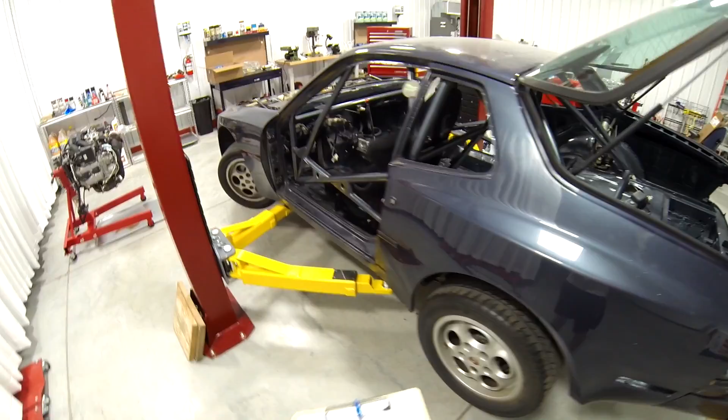We're here with our 1987 Porsche 944S. Her nickname is Porsche McPorscheface because I couldn't come up with a decent German female name that I liked.

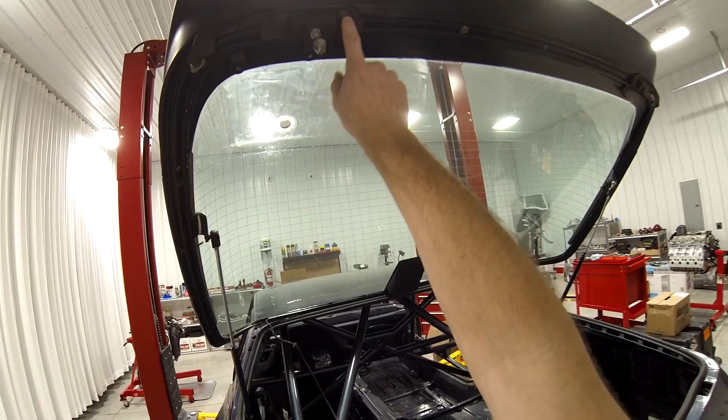So our goal today is to prevent our hatch locks from leaking water. If you have a normal 944 and you're going to use your hatch locks, unfortunately the best way to fix it is to replace this rubber here, replace this rubber here, and replace this rubber here. And I hate to tell you, but $100, $100, $100. The most blatant, complete ripoff.

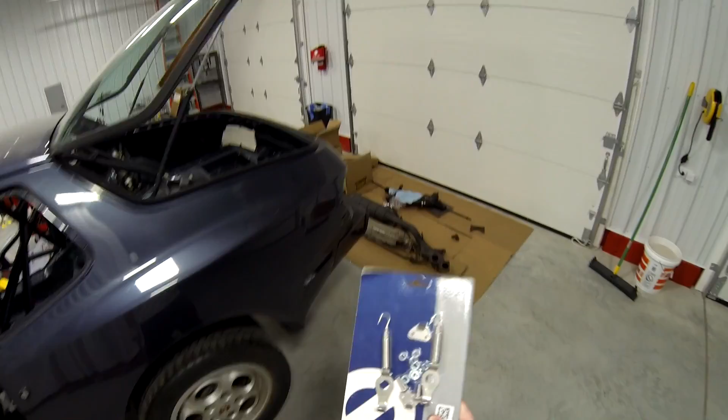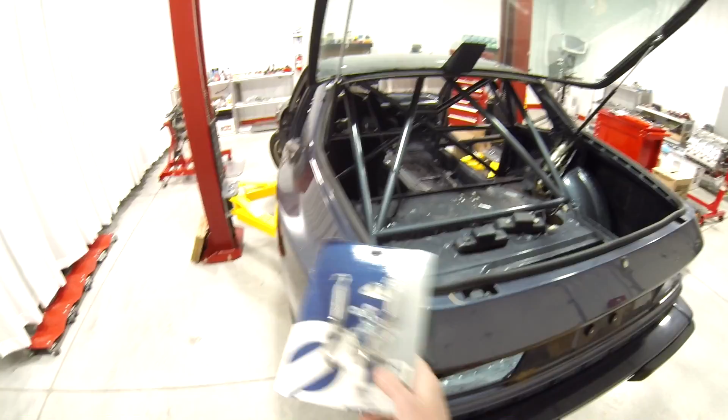It's just awful. Now, because this is going to be a race car, and of course I left my example all the way across the room, it is required by the FIA and the local rally racing rules that you cannot have any locking mechanisms on your hood, doors, or hatch. Somebody has to be able to get into the car to either shut your fuel off, save your life, or pull a fire extinguisher or med kit out. You can't lock anything. So you have to use these.

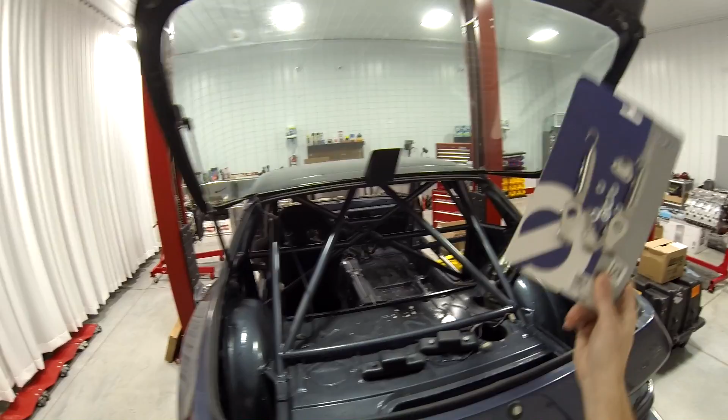I'm going to use 4 of them because of how heavy this hatch is. I'm going to mount them probably here, here, here, and here. I'm still working on how that's going to work. So I'm going to completely remove this locking assembly. And you can see I already gutted the interior assembly. So this specific engineering journal is completely useless to somebody who's going to use this hatch lock.

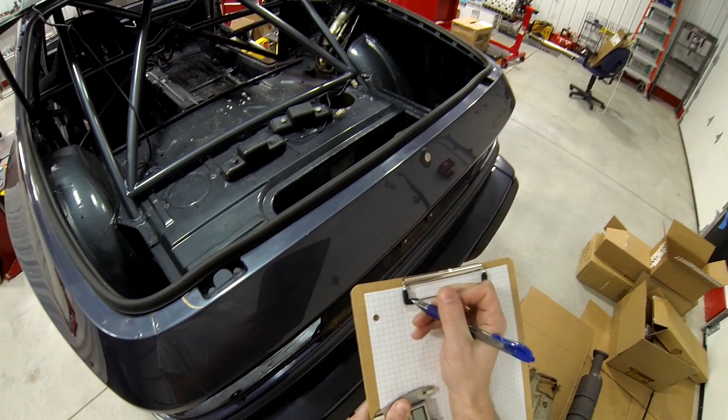If you're going to use something like this, in this case, this is a genuine Sparco product. I double and triple and quadruple check since Amazon's completely unreliable these days and they sell Chinese counterfeit products with the same brand name and packaging. Anyway, I don't know which engineering journal this is, but it's part number 7, and this is the hatch lock seal.

So the first thing to do, and it's going to kind of suck because this light's shining right in my eyes, is to figure out if I can remove this, is it going to cause a leak from up here? And if not, then can I just cap this off with a 3D printed cap and some silicone and call it a day?

Which is my primary goal. My secondary goal is to create a cap that actually dips down so this lock clears the 3D printed cap, but then water would pool in the cap.

Also, if you don't have this seal fully sealed, 100% water and airtight, then the vortex off the rear wing, or tail of the car, will actually lift your exhaust fumes up and right into the hatch, and you're not going to have a good day. That's also why the taillights have to be fully sealed properly for water.

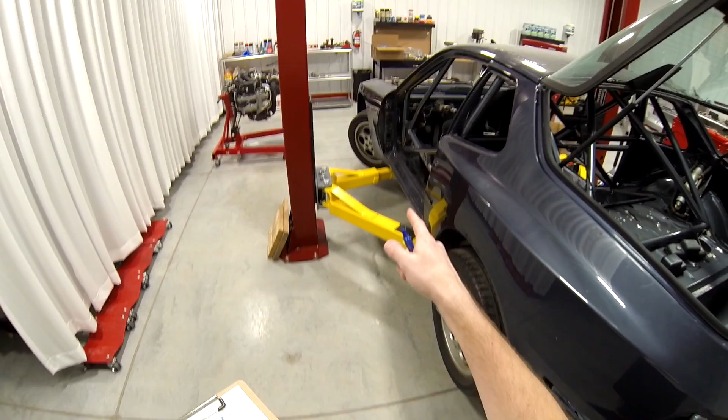I'd like to shoot my exhaust out the side, but you can't do that because there's interior stuff in the way. I might be able to shoot my exhaust out there, but the torsion bar is in the way, so we're still working on that. We can't shoot it out in front of the driver door because that's illegal, and this car, being a rally car, has to be road legal.

All right, anyway, so the first step is to get this disconnected, and it looks like it's a triple square. Now, if you haven't heard the term triple square before, then you've probably never worked on your Porsche before. It is a wonderful little proprietary driver set.

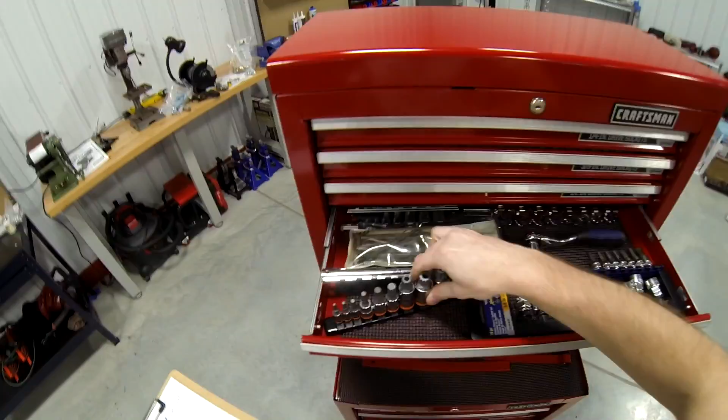That obviously is extremely expensive, even more expensive than Allen or Torx, and it's used in many places on the car that are extremely questionable. So you're gonna need this. And then I'm gonna have to, of course my 3/8 is missing, so I'm gonna have to hunt it down.

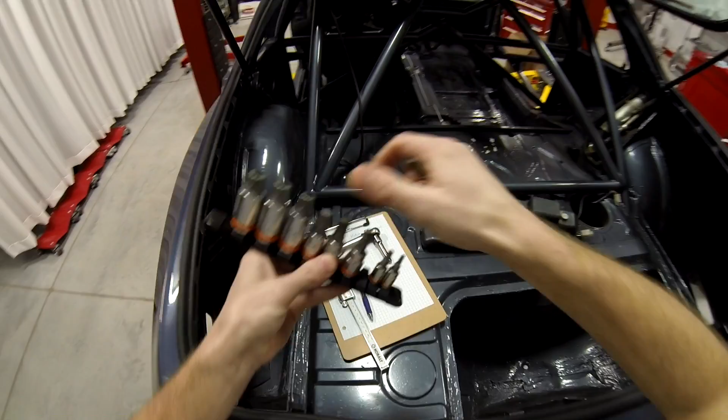Okay, all right, so we're going to remove this lock, or we're gonna attempt to. It might be smarter for me to use an impact, but I don't think triple squares like impacts. And of course it's a freaking quarter inch. So stupid. I hate triple square.

Just because you make something exclusive doesn't mean it's high quality. Porsche.

Okay. Hopefully this thing isn't frozen in place.

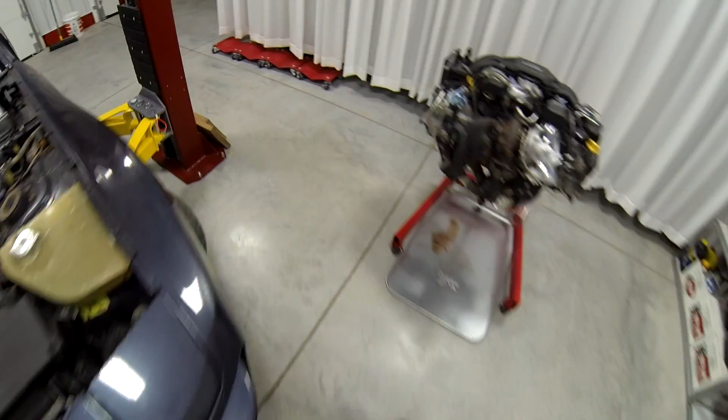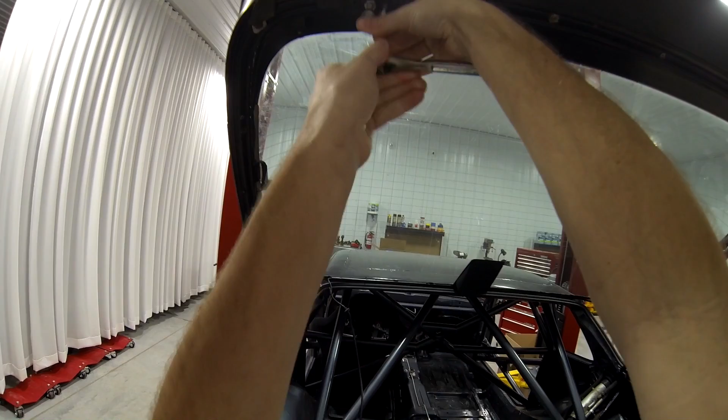I apologize, normally I have my tools closer to my work area, but everything's a complete mess right now because of the engine build we're waiting on oil pump bolts for, which is frustrating since the oil pump and timing chain kit didn't come with oil pump bolts. Those bolts are apparently special order. At least from the dealership I was at, they didn't have any within a couple hundred miles, so they're coming from a long way away.

So we take these out, and I am going to try and reverse engineer this. Man, it looks like it's pretty stuck in there.

Let's see, I might need a... again, I apologize, my toolbox is so far away from the workspace, I don't have anything, everything's a mess. Yep, it's a 13, what a surprise. Man, I am so surprised. Not really.

Okay, so we're gonna loosen that all the way up. Oh, well, I didn't need to do that actually. Just broke it loose. So it looks like this piece actually...

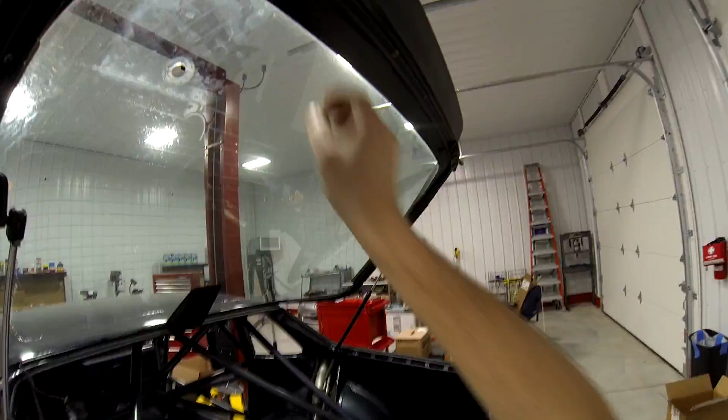Yeah, because the seal where this attaches, it looks like there's gunk in here. I need to... somebody maybe tried to repair a leak the wrong way at some point, is what it looks like to me. Yeah, there's that welding from the OEM. Man, what a shit job.

So this block is gonna go down in this recess, which means I need to 3D print this with enough room for this block to sit. And it also means we're gonna have... oh boy, yeah, they don't make this easy. I think removing this is the right thing to do though, and I'll design this in 3D CAD.

Unfortunately it's pretty ate up, but I think I could at least help somebody get the 3D CAD, and then if they wanted to take it to a 3D printer that was a little more skilled, meaning not extrusion based, but like an HP printer or some high dollar setup that can print flexible polyurethane or TPU, thermoplastic polyurethane, then they could probably have a seal printed.

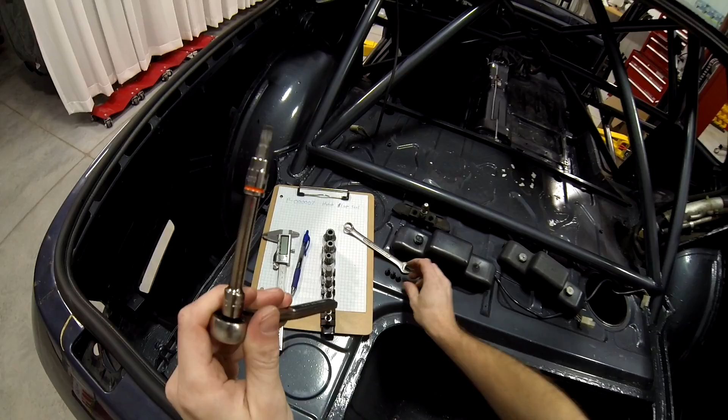And I guarantee you, especially since I'm doing the CAD myself, which is the most expensive part, it would be way cheaper than $100. It'd probably be like $10, I would assume, no less or no more than that, because I just can't imagine it being any worse.

That's what a magnetic parts tray is for. Okay. Just... oh yeah, not like I just vacuumed that or anything.

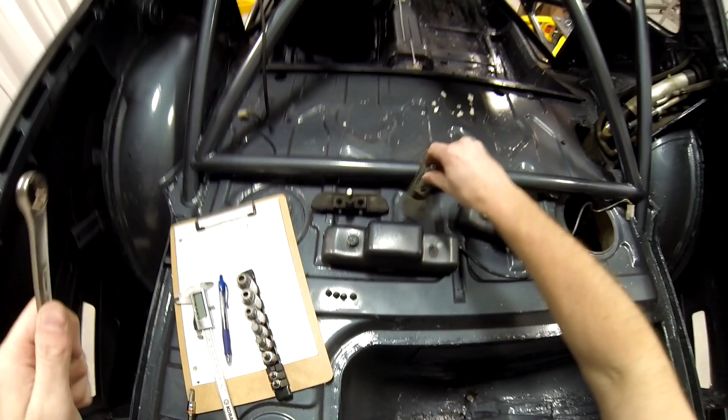Okay, so now I have both of these. They are perfectly... wow, that one's really torn up. Are they not symmetrical? Uh-oh.

Ooh, they're slightly angled. Huh. Oh hell, I need to keep those as far apart from each other as I can, or I'm definitely gonna get them mixed up. So I don't think there's any L's or R's left after all this time.

Man, it's like a metal rubber composite. Still not worth $100, you're never gonna convince me of that.

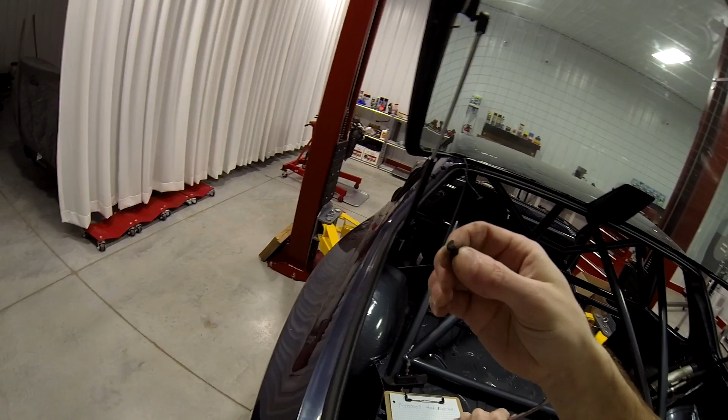So now the next step... yeah, there's like somebody was trying to repair it with epoxy. That's pretty shitty, that makes my job way more difficult.

Damn it. I'm gonna have to... and I need to get an accurate measurement, so I'm gonna have to scrape that off real quick. I have a putty knife hiding somewhere. Scrape, scrape.

And it looks like I might have to 3D print a little piece to go over this in order to seal properly, or just do what they did and use some putty.

Man, I can't tell if that's hard, that's hard to tell. Sorry, this was supposed to go a lot smoother than this, but obviously in the real world it never does, right? There was a flashlight around here somewhere. There we go.

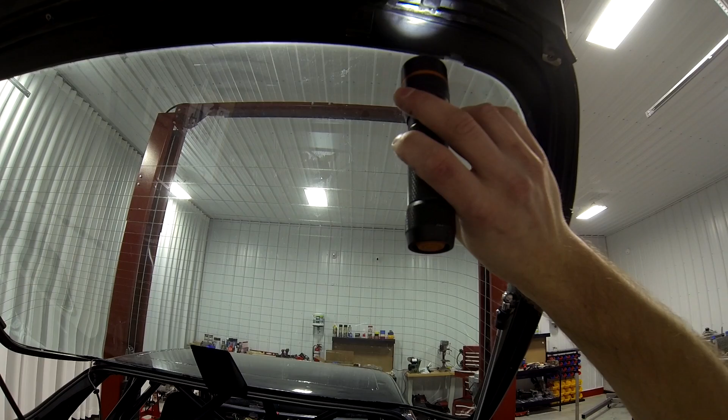Oh yeah, somebody just shoved a bunch of putty in it. Of course.

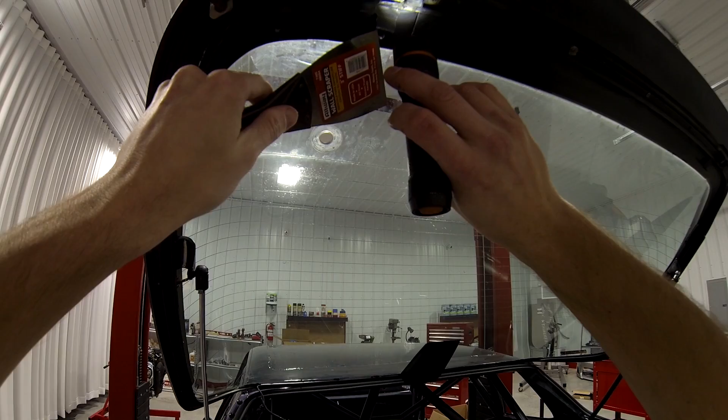Well, it looks like there's seam welding and putty, so I might have to get somebody out here with a wire wheel. There we go. Yeah, so there's some seam welding, which we can't do anything about, and then there's putty from somebody trying to make a cheap-ass repair.

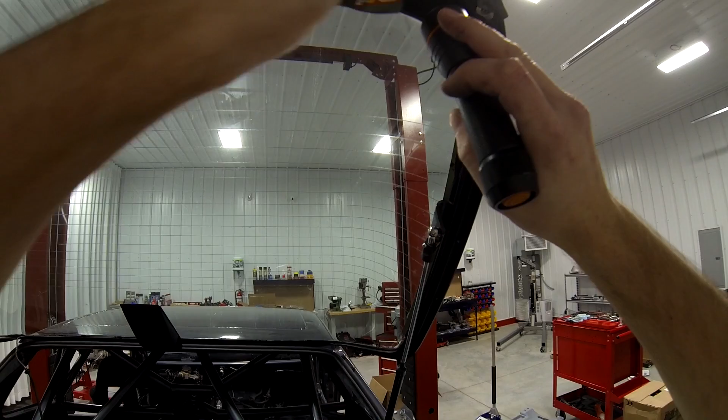Okay, so that's a seam weld. That's a seam weld. Definitely will need to 3D print something to help this gasket not get torn up. It shouldn't be that hard. It's just staring into this freaking sunlight.

Okay, that's pretty clean. So, my workbench is a disaster, by the way. The whole shop's a disaster right now.

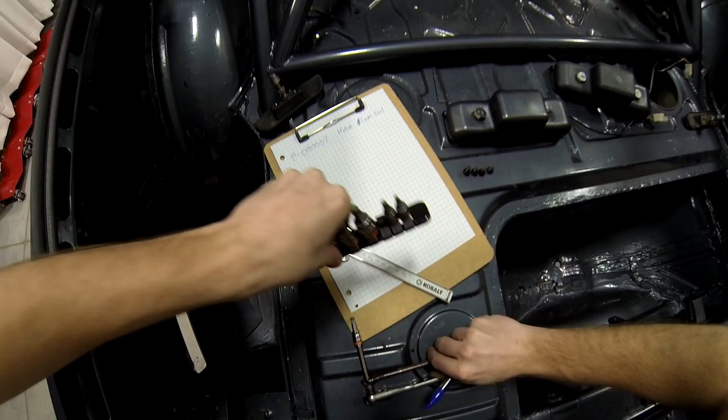So anyway, this thing, keep all of these here. And if any bolt on this car that I take out is a triple square, I am not putting a triple square back. I'm gonna go get a normal socket head bolt or a normal hex head bolt at the highest possible grade, so I think it's like 12.9, and replace it with that, because I hate triple squares.

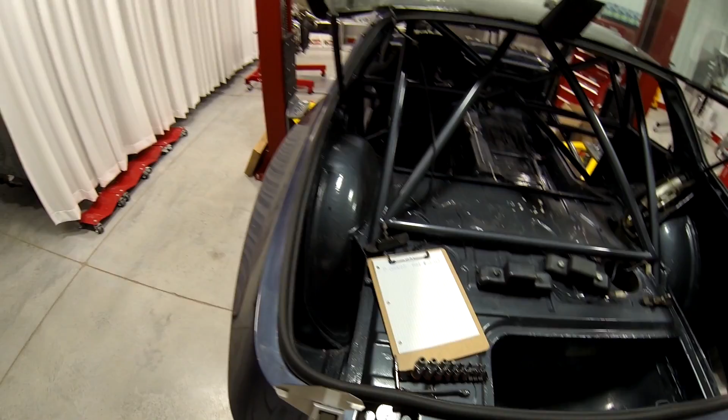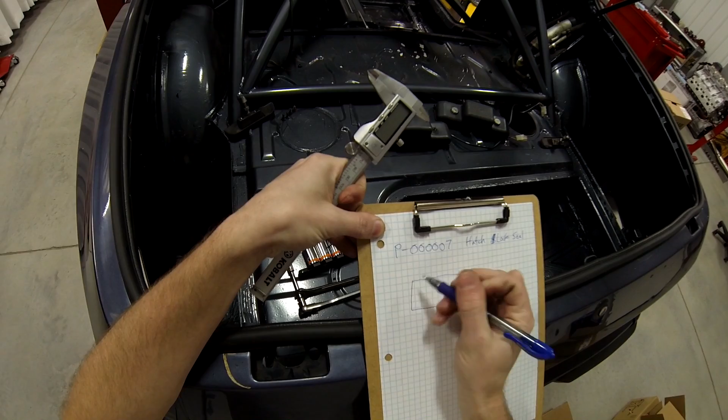Okay, so it looks like this lock hole is just kind of stamped into the body, and it is symmetrical. I can tell just by looking at it. And it's also a nice simple square, so we have the square, and then we're going to have radiused corners. It looks like the front radius is a little sharper than the rear radius.

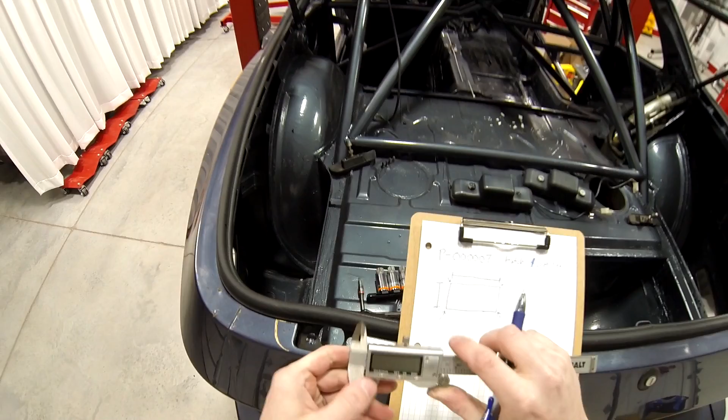And I know it's dumb to write with a blue pen on blue paper, but I couldn't find a black pen. So we're going to use the 3D printer's own properties of how basically anything you print is going to shrink. Even depending on the material, it could be a little bit or it could be a lot.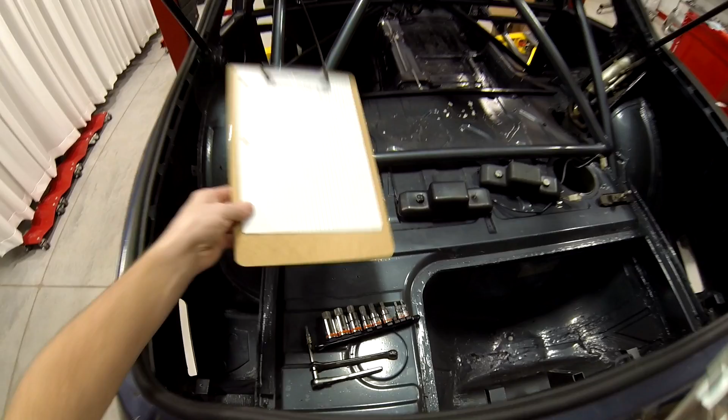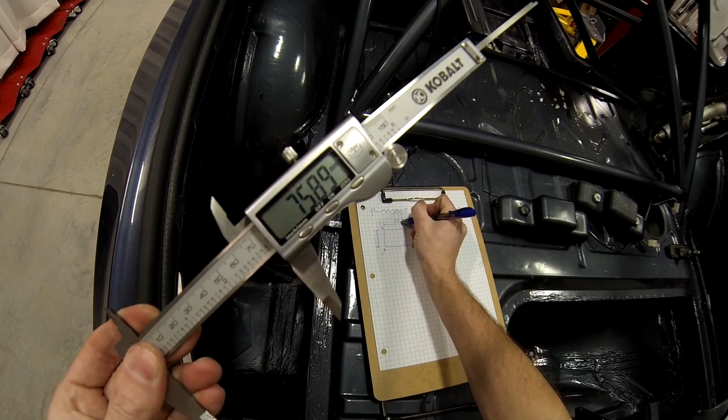So we're going to use that to our advantage and let it shrink, we're going to allow it to shrink, we won't compensate for it. And what that'll do, so 75.92, that will allow us to fit just a little bit of silicone sealant to make sure we keep all the nasty stuff out. Okay, so 75.92. And then this will be a little harder because I already installed the seal.

Try not to mess up the brand new $100 seal. 33.63. 33.2. I'm gonna go with, let's do 33.

See, these weird dimensions, a designer didn't choose 75.9 millimeters. He probably chose 76 millimeters, and the car has just gotten a little old. Or the paint on it. Shit. I'm gonna do 33 on this. I'm gonna make it a little extra small because this seam is in the way.

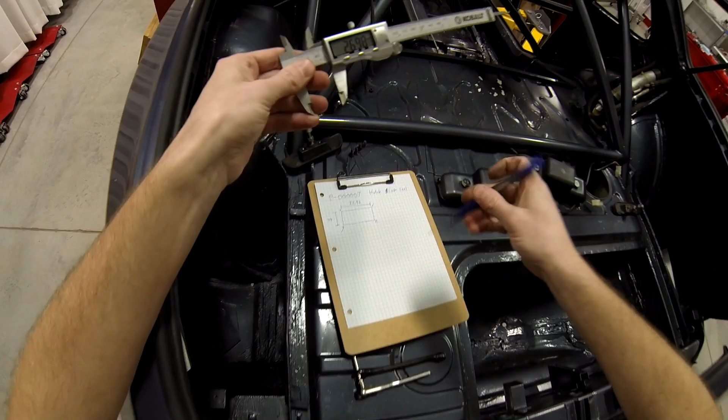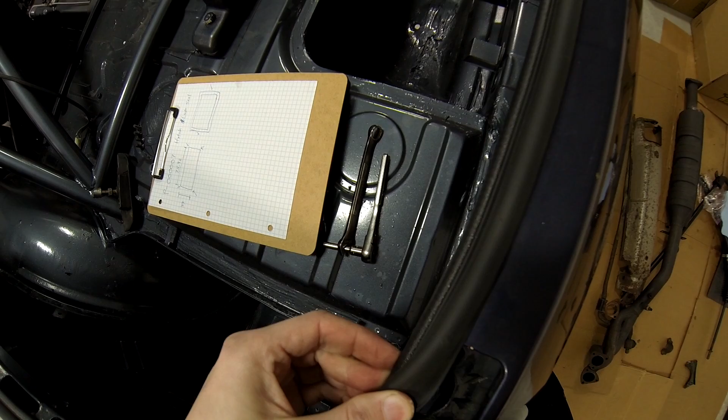So now we need to know how much room we have around the hole, right? On the sides it doesn't matter, but on the front we have very little room because this seal here is in my way. I would say we have 4 millimeters, and I'm gonna butt it all the way up to the seal so I can be sure it's sealed. So we have 4 millimeters, and that's this dimension.

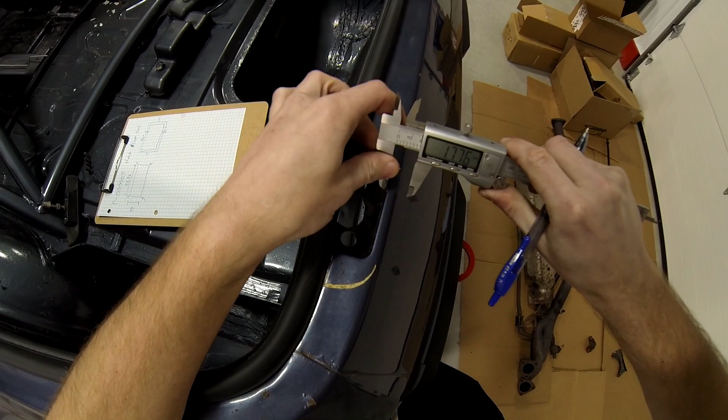And then this dimension, we have a little more room to play with. I don't want it stupidly sticking out the back of the car, but at the same time I don't want it to be too... and yes, this is scratching the paint, so I don't need to get yelled at about that. It's a race car, not a show car.

7 millimeters, I would say. 7 millimeters would probably be too noticeable. I can go down to 6 millimeters and we'd still have, let's say 6 millimeters, we'll try that. 6 millimeters. Whoops. And we'll probably have to print more than one prototype, of course, but we'll see.

So now the problem is this freaking thing. I could try and print an exact match for this inside of here. However, if I do that, then how would I describe it? Then if it moves a little bit, especially because I have to realign the hatch because the hatch is out of alignment, and if other people have a hatch that's a little twisted... right now it's not even coming anywhere close, and it's because my hatch is out of alignment, so just to give me a little break on that, but no, it's dipping down in there.

Yeah, and I think I'm gonna have to 3D print myself a new one of these, which my printer can't print that long, so I'll have to glue it together, or I don't know. And I'm not paying $100 for this little piece of rubber, that's complete, it's just a ripoff. You can literally fire up the rubber mold and make 1,000 of them in a day for 10 cents each, so trying to act like it's because it's an old car is completely false. That rubber mold still exists somewhere, and they can make as many as they want, and they choose not to drive the price down.

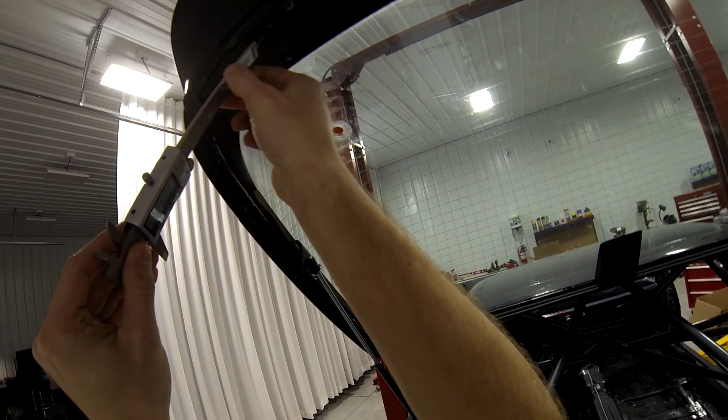Okay, so I'm gonna make a full height safety margin for this thing because it looks like it's gonna need it. And it's kind of tough because, see, 7.45, it's at an angle.

It's at a pretty good angle. Let's see, maybe I can do this a little more intelligently. What am I doing wrong here? There we go.

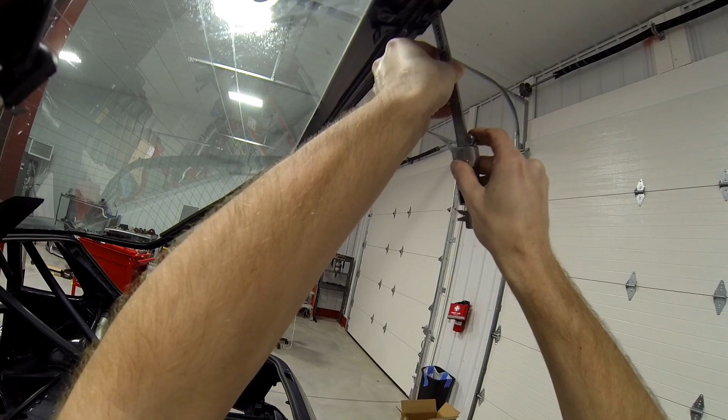12.45 minus 6, so 7 point. So I'm gonna do, we're gonna dip down 8 millimeters, and that'll be like the full length around it. So it'll be like a pocket, 8 millimeters deep, which may hold a little bit of water, but I don't feel like it'll be a big deal.

I wish there was a better way to do that. And then for over here, for this spot, I can almost guarantee we're gonna have issues with this harsh welding cutting into the seal. I'm gonna design a cover for this, so it'll be a square.

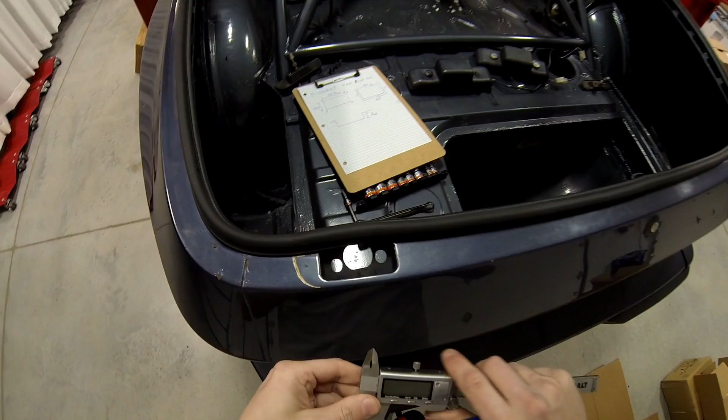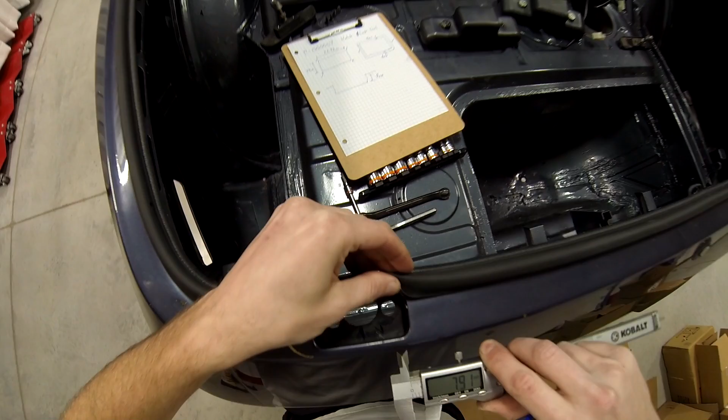Oh, I almost forgot the radius on the corners before we. So corner radius is kind of a guessing game. For example, this looks like an 8 millimeter radius, and this looks like 8 millimeter. The problem with corner radius is if it's too small, then it's really not going to fit. But I think 8 millimeters all around.

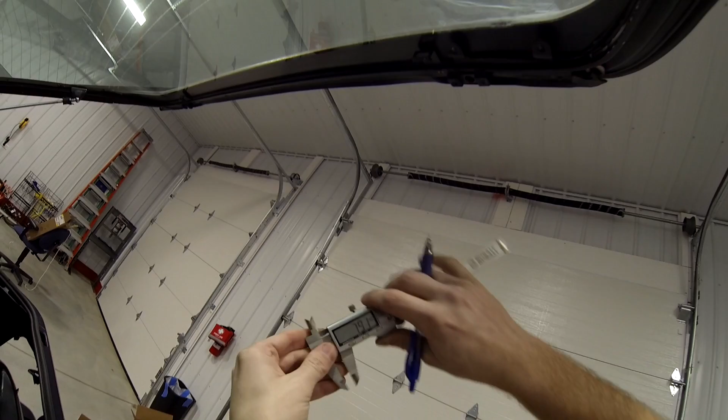Should be pretty good. Okay, now for the counterpart, which unfortunately... wait. Ooh, I almost made a big mistake there. That's... I forgot that's tilted in multiple directions.

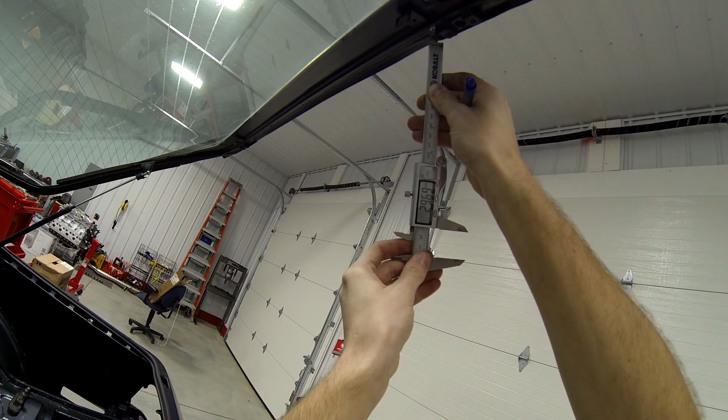9 millimeters, 9 millimeters. Man, they just don't want this to be easy. 16 minus 7, that's 9 millimeters.

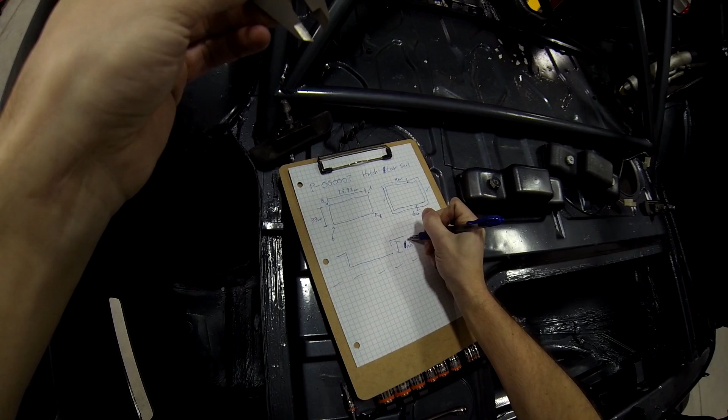And I don't know if I can 3D print a cover for this because of the way it's angled. Because it's going to be, well, okay, let me try. I'm going to try. So I'm going to do a square, a rectangle, sorry, a rectangle.

It's 53.8, 53.87, 53.87. And the problem is it's got this little weld on it, so getting an accurate measurement off of it won't be easy. 18.65.

Okay, and then I think the corner radius is pretty small. Say 4 millimeter corner radius all around. Luckily this TPU is pretty reliable when you print with it.

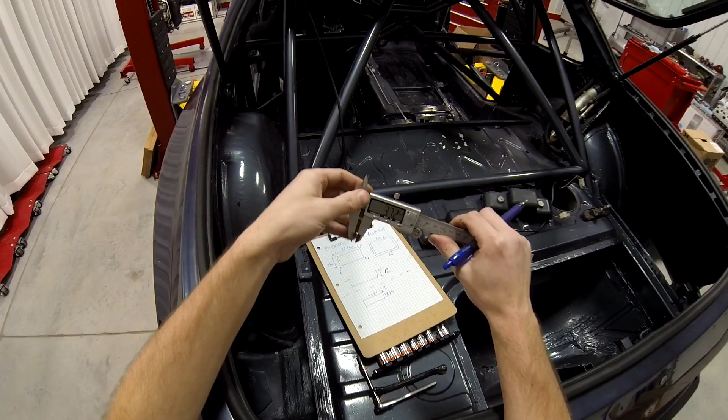Okay, now the angle, so this is where you'll have to mirror it, but that's pretty straightforward. So the problem we have is that we are looking at, kind of goes like that. So it's got a height here and a height here. Then I also need...

Point one four. Every time I measure this, the measurements change. It's driving me crazy. 8.96.

And then we need to know this pinch weld kind of chamfers out. So we need a nice... it's going to be really thin. I mean, this is probably going to be, let's see, a single print layer, 0.4, 0.8. It'll probably be either 0.8 or 1.2 millimeter thick. It'll be super thin and flexible, so it'll seal good. But we need like a skirt that's chamfered, but then, oh man.

Okay, we're gonna try it this way. We're gonna try a skirt that's just super simple for now of 6.66, so 7.

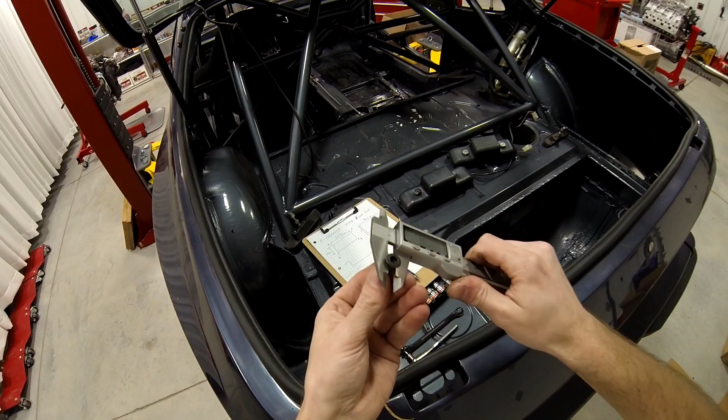Okay, and then we need to know our hole sizes and positions. That's going to be a little tough. So hole size can get off of this, which is going to be 6 millimeter. So the hole size is 6 millimeters. And the position looks like it's held pretty constant from the outer right and outer left side. So the hole position, and this is just a guessing game at this point, it's going to be super flexible, so we should be okay.

7.68. So I'm going to say 8 millimeters because I don't see why a designer would choose such a weird number. I'm going to say 8 millimeters for the holes. So we got the angle, and then we can create a shell feature to give it the thickness we want.

And then printing it's going to be an absolute, almost impossible, honestly, to 3D print. These are going to actually, now that I look at it, just having the little dip down in here to compensate for that is going to make it a lot harder to print. I'm talking a lot harder because of the way the 3D printer works.

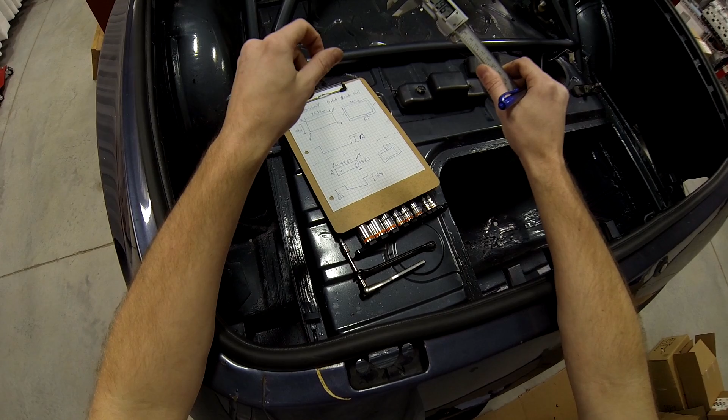Oh, this is gonna... well, I can at least design and print. Try to print the design. If not, I'll have to change the design, but...

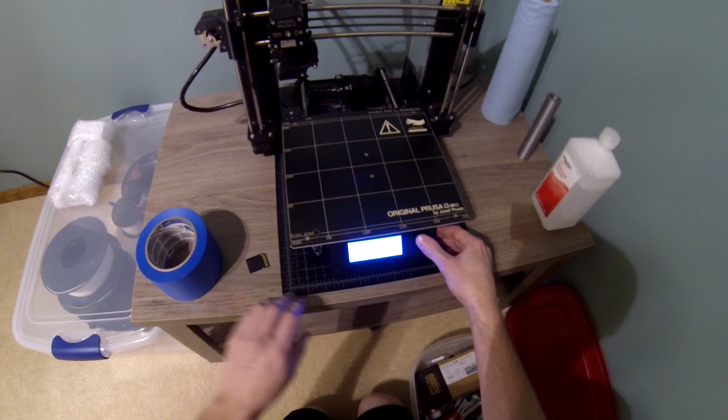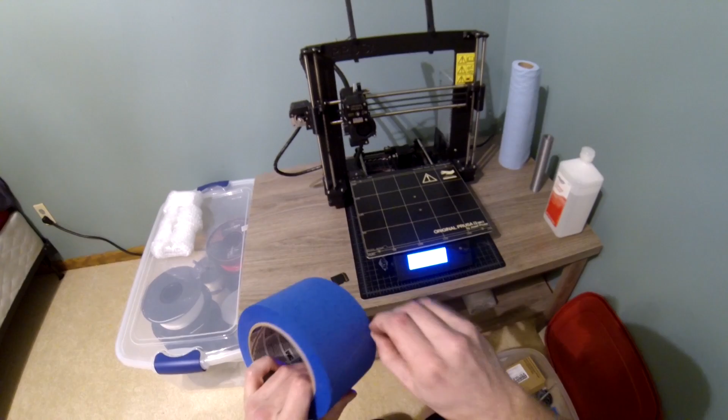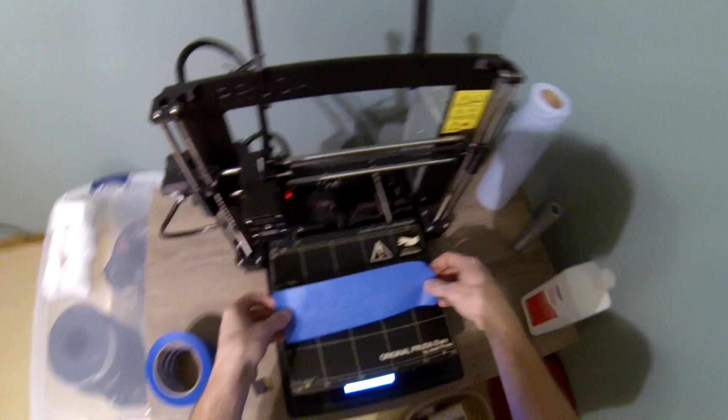So we're going to get the temperature of the bed up to 60 C to help avoid warping and to promote adhesion. I think what we're printing is small enough that we can get away with just a single piece.

Now obviously I just put my skin oil all over it, so you want to, well I need to stop wasting these blue towels, but they're so useful. Get a little bit of alcohol, and make sure that tape is stuck down and free of oil. Then you can clean off the rest of the print bed. I probably forgot to clean it last time.

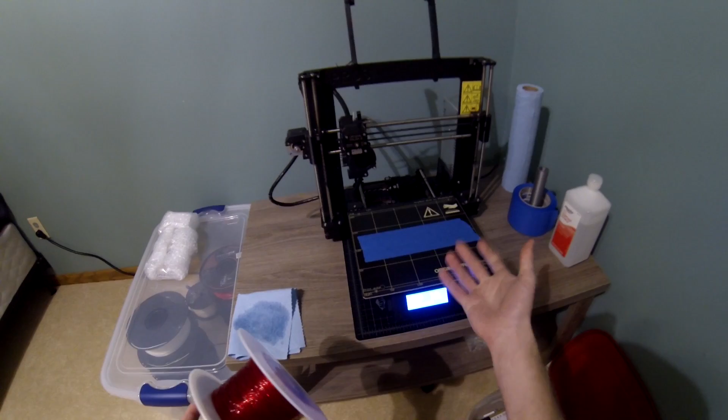So for those of you that are going to ask why is everything in this bin - it's because you're supposed to keep your filament in an airtight bin. This isn't airtight, but it's close enough, with gel packs, this little desiccant gel, to prevent water from absorbing into your filament. When that happens, you're going to have problems, because when water is inside your filament and you heat it up to 220 degrees Celsius, it's going to cause problems. So keep your filament dry.

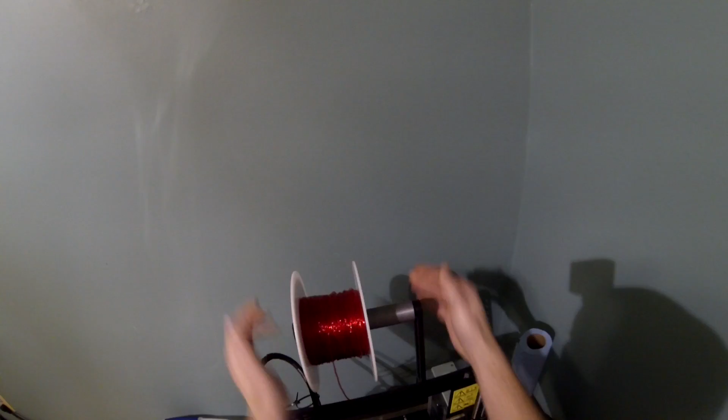If you notice your filament making popping sounds, then you need to throw it in your oven and dry it out. I've never had to do that, luckily. I keep a really close eye on this desiccant, and there's a lot of it, so it's easier to dry that out in the oven than anything else.

So now the next thing we need to do is unload our old filament. I'm going to go to settings. This is a Prusa, P-R-U-S-A, Prusa Mark II-S. It showed up like a day before they announced the Mark III, and I'm still livid about it because the Mark III is so much better for almost the same cost.

So anyway, settings, temperature, nozzle. The nozzle temperature for this is 220, and the nozzle temperature for the stuff that was in here was 215, so it's okay to just go ahead and crank it right up to 220.

I'm going to get ready here. Oh, and then I need to go to settings, live adjust Z. I need to push my Z up 0.1 millimeter to adjust for the thickness of the tape, otherwise you could cause a crash. You have to make sure to adjust it back down too when you're done, or it won't stick to the print bed. So my live adjust Z is adjusted for the tape.

Now once this hits about 180, I'm going to pull it out, and you don't yank it out, of course, I'm going to use the control panel properly. But I don't want it to be too hot because then it'll stretch and it'll be a lot harder to clean the nozzle out. I'm going to go to 160, not yet, 170. Okay, so unload filament.

So I'm going to take the GoPro off so you guys can kind of see what's going on here. I'm hoping I'm aiming where I want to be aiming.

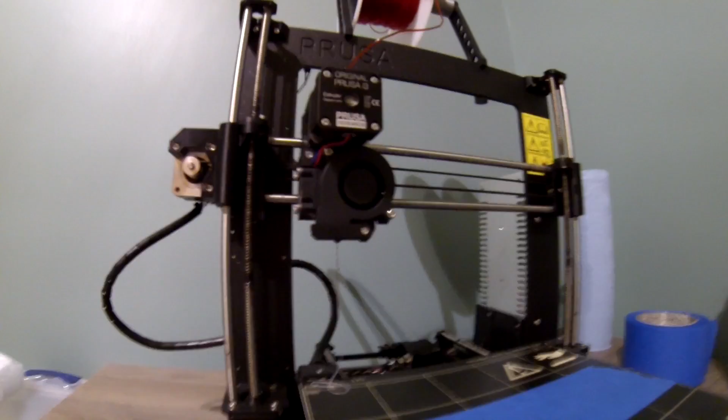So eventually it's going to start coming out. I might have to just give it a minute. Okay, that was a little weird. Try it again. There it goes. So now we're pouring our filament out, and you can see it changing colors.

So the problem is just because it changes colors doesn't mean the nozzle is clean and ready to go. So we're gonna say yes, the color is clear, and then we're gonna load again because it goes a lot faster when you restart the program.

And so then I got my giant tweezers, which are super awesome helpful. You guys need these. I think I just searched large tweezers and I got, what are these, like 11-inch tweezers? Yeah, nice, helpful. Spatulas, woodworking tools, wire cutters, leftover zip ties.

Excuse me for a sec. Excuse me, sorry, fighting a cold.

So it's gonna go through its routine. You can see we wasted some filament, but trust me, it's worth wasting the filament because you're cleaning out the nozzle to get a nice clean start. So you can just stick this stuff over here.

Now, yes, the color's clear. Okay, so now we can print from our SD.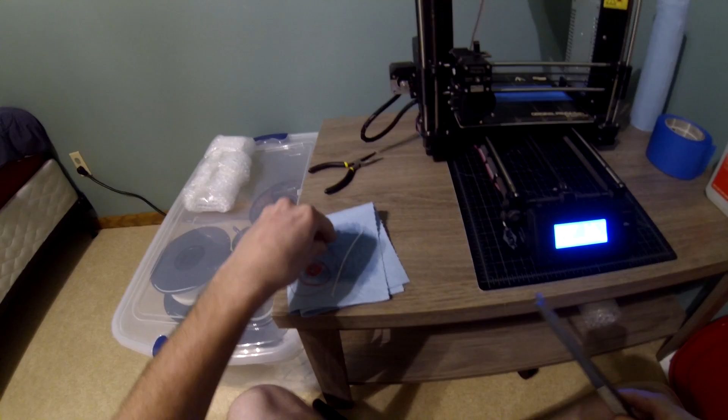And I have never printed flexible material with supports, so I don't know if the supports are gonna stick or fall apart, or if they're gonna be permanently stuck on, or if I have to cut them off. I have no idea. So it's kind of up in the air. I've never done flexible material with supports, and I know it's not recommended, so we'll see what happens.

And I'm hoping my little piece of tape here is big enough so we don't have overlap. So I already lost one print bed, which has now become a cool GoPro mount, but hey. Alright, here we go.

And I don't have any kind of time-lapse rig right now. I could, I don't know, try and rig up something with the tape.

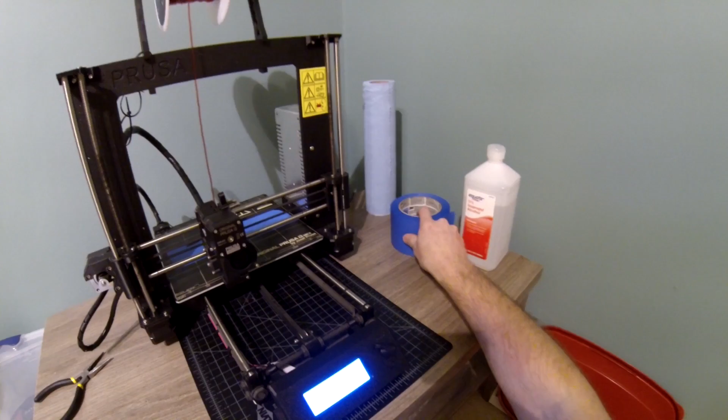Oh yeah, and then one other thing, tune. I always go to Flow 105 to make sure it gets a good solid bond. So it looks like we just made it just right. You can see my outline, and then we also kind of look at how flat it is. Like, is it too close to the tape, too far from the tape? It's sticking really well, so we're gonna leave it alone.

And unfortunately, I can't just sit here and let it, you know. So I'm gonna edit video while it's running, and I gotta kick the cat out because I don't want him playing with it and getting burnt.

I want to wait for it to start. I always watch the whole first layer. Now the only problem with this is this stuff is super slow, so it's printing the support material first so the support material can cool down and hopefully not stick to the stuff that you want to keep.

It's a very smart printer. I just wish I had the Mark III because it would be more stable. The Z-axis on this thing's not very stable, and also my firmware is way out of date, and I need to get my Surface laptop, whatever, and plug it in and update the firmware on this. I just don't want to deal with it.

Hi. Hi. Hi. What are you doing? Ah.

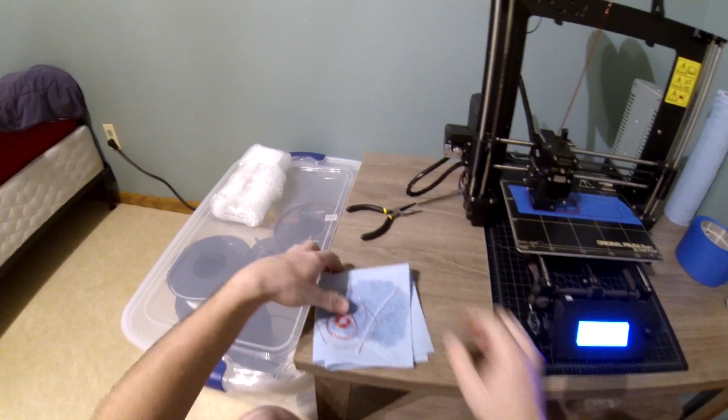Okay, it looks like everything's working great, so I'm just gonna leave it here. I'm gonna go edit video and come back, and I apologize I can't time-lapse it. I need some kind of time-lapse rig, and I don't really have one. I mean, I could try to half-butt set up a... Let's see if I can do that.